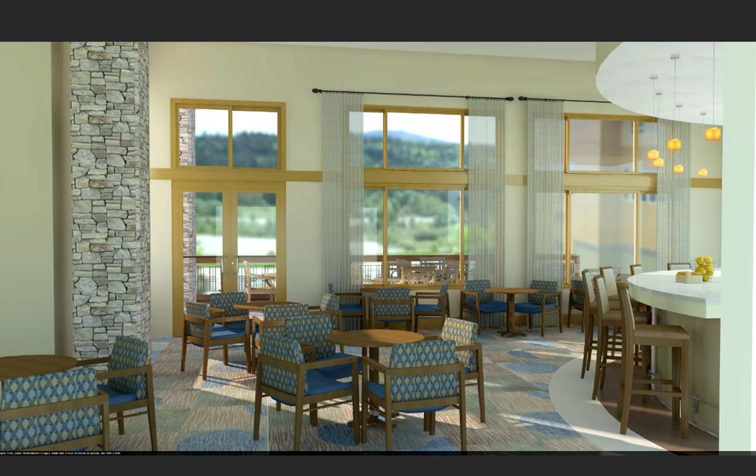Sometimes you're concerned that if something is too photoreal and too crisp, your client might be too locked into thinking this is the exact detailing it's going to look like in the end. Or sometimes you just want a different kind of feeling to present to the client when they're looking at your design. So today we're going to take this image and make it look a little more painterly using some very quick steps in Photoshop.

I'm not a Photoshop whiz, so this is easy for me, but also easy for you to replicate. This is the SketchUp model I used for the final rendering, and this is how the final rendering turned out. It's fine, it's okay, but going along with what the client really wanted, a little more painterly image, this is the image that we actually presented to the client.

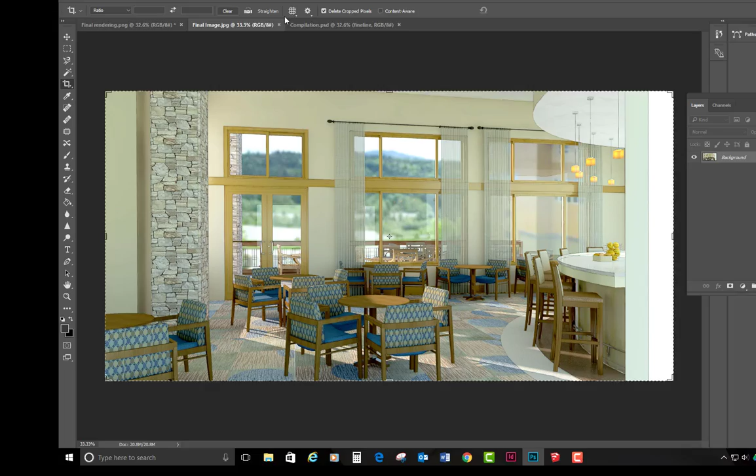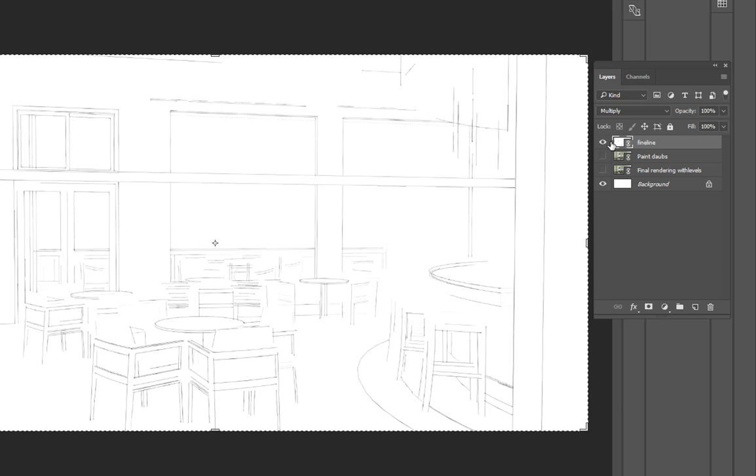Let me show you the 3 different steps that go into putting this together. Here in Photoshop you can see the 3 different layers I've combined. Here's the final rendering. I also created a layer called Paint Daubs, which is just adding a Photoshop filter to the final rendering. Then we overlaid that with line work that we pulled directly from the SketchUp model. Let me show you how those 3 steps come together.

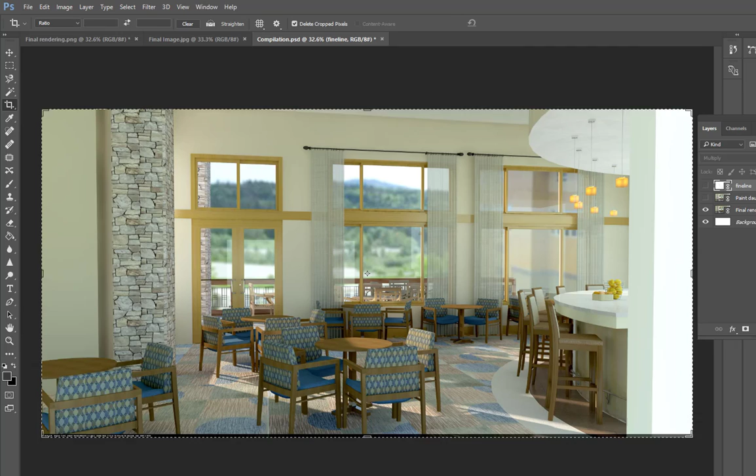First I'm going to note what size I rendered this at, so I'll go to my options. You can see I've made the image size pretty large, 4000 by 2000, because I want to print this out as a large board. So I'm going to go to Photoshop, File, New, and create an image that's the same size, just my blank canvas, 4000 by 2000, and create that.

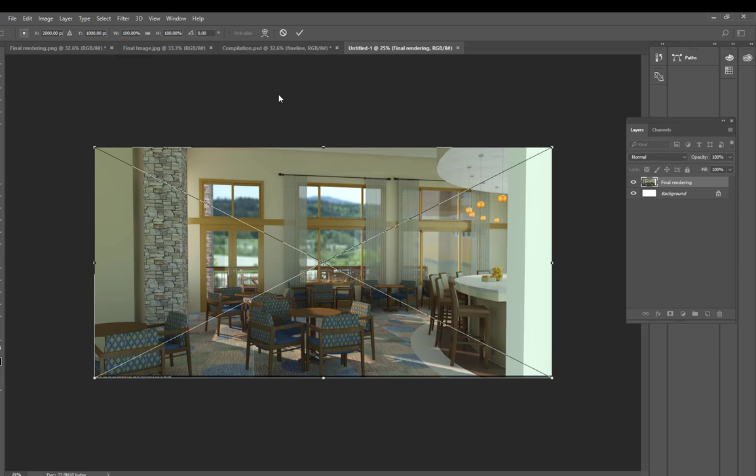Then I'm going to go to File, Place Linked, and go to my final rendering and import that in. Right now it's kind of dark, but honestly once I add these other layers I'll have to adjust the levels anyway, so I'm not going to worry about that too much right now.

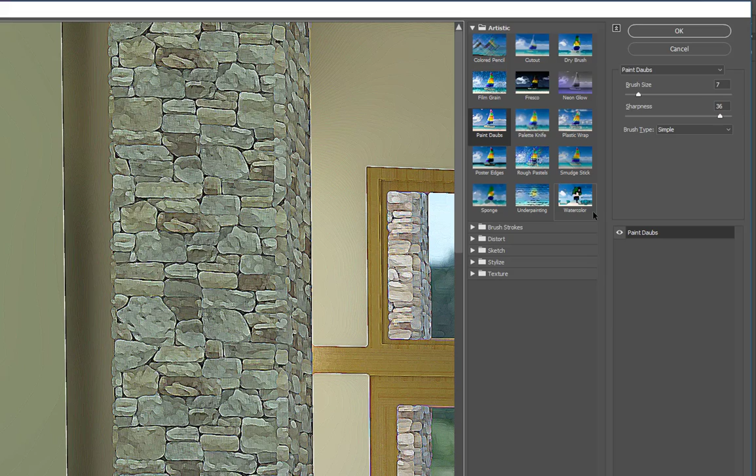The next thing I'm going to do is use Photoshop's artistic filters to create that more painterly effect. I've opened up the final rendering here, and I'm going to go to Filter, Filter Gallery, which opens up a variety of different kinds of filters, and I usually work with this artistic level. If you suddenly can't see your image, go back down here and just say Fit on Screen.

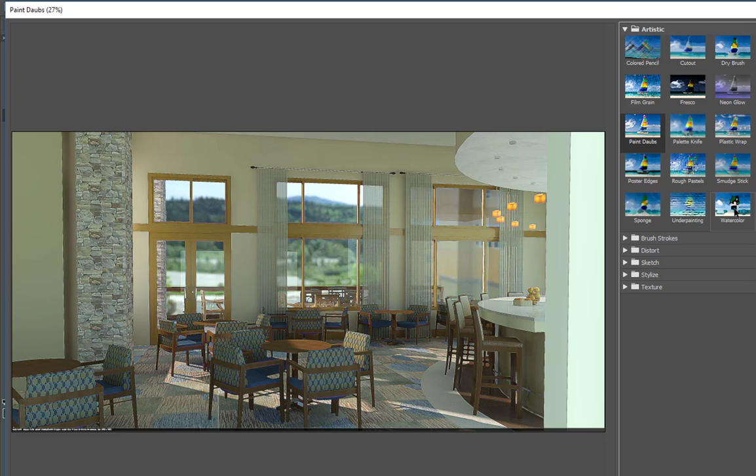A few that I use quite a bit are Film Grain, and you can see as I click through these what that looks like. This one's called Paint Daubs. I also use Watercolor a lot. You can see on any of these, by changing the level of the brush detail, the shadow, the texture, you can create different looks with each of these artistic filters.

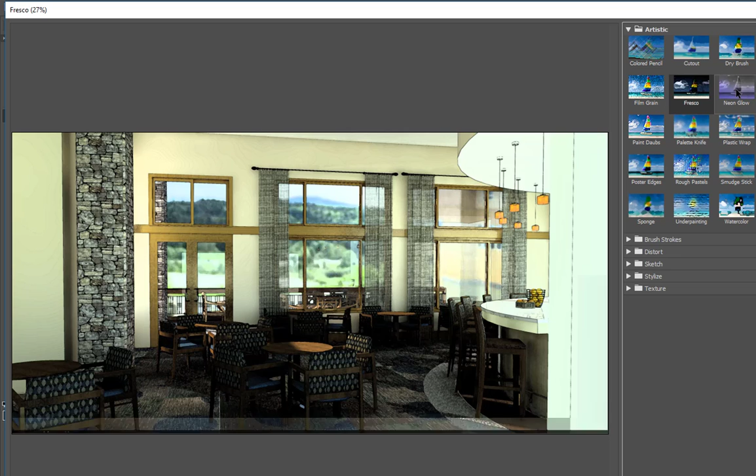It's kind of fun to go through them and see all the different kinds of effects you could get. Remember, this isn't going to be our final image - we're going to layer it with our final rendering to kind of give it a softer look.

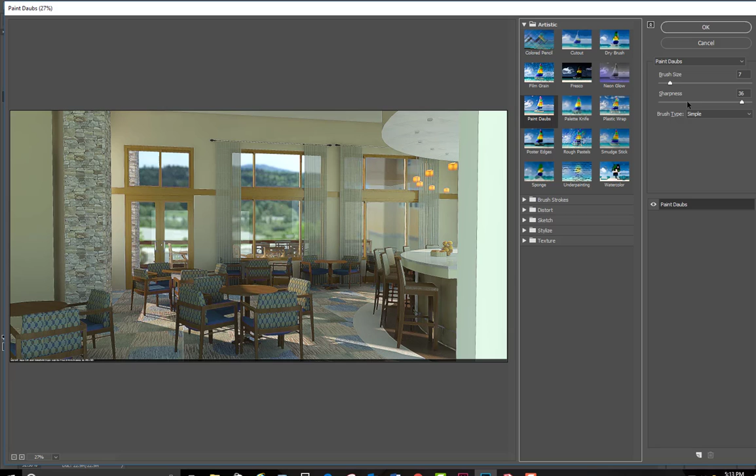I'm going to use Paint Daubs, which I use a lot, with brush size set at 7, sharpness set at 36. So it just creates this softer, not quite so crisp image of my SketchUp model here. When I have that as I like, I'm just going to say okay.

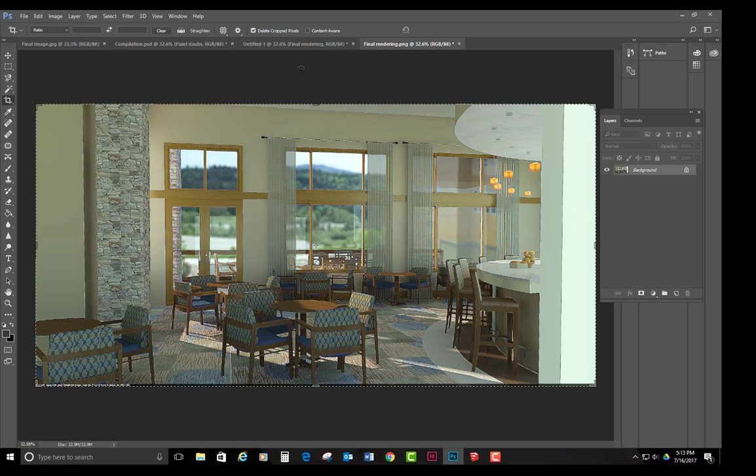And I could save that - I already have it saved as Paint Daubs, but save it as something similar, because that's one of the layers I'm going to put together in the end.

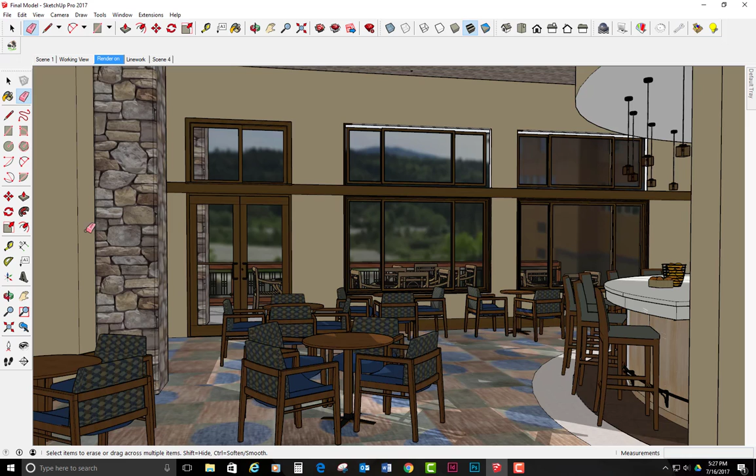Next we're going to create the line work that's going to be like an overlay to our final image, and we're going to pull that directly from our SketchUp model. Here is the image we were rendering, and I'm going to create the line work by using one of the styles that comes with SketchUp.

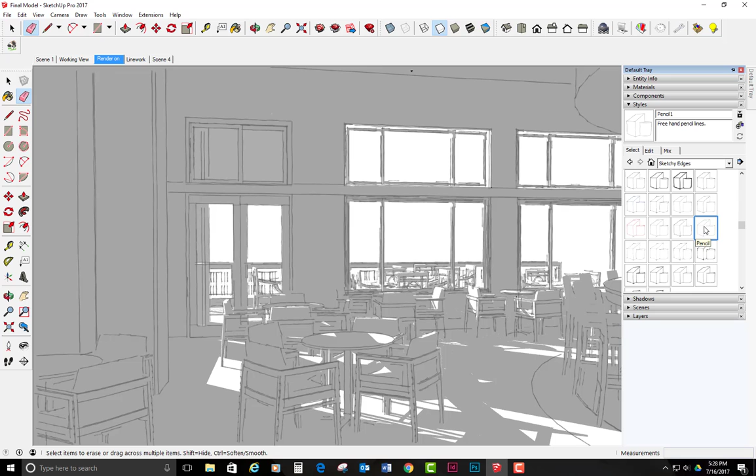Going to the sketchy edges is really a great place to start. I often use pen black, for example, or maybe I might use pencil. Whatever I use, I am going to turn off the shadows, and that's going to make sure the background is a nice uniform color.

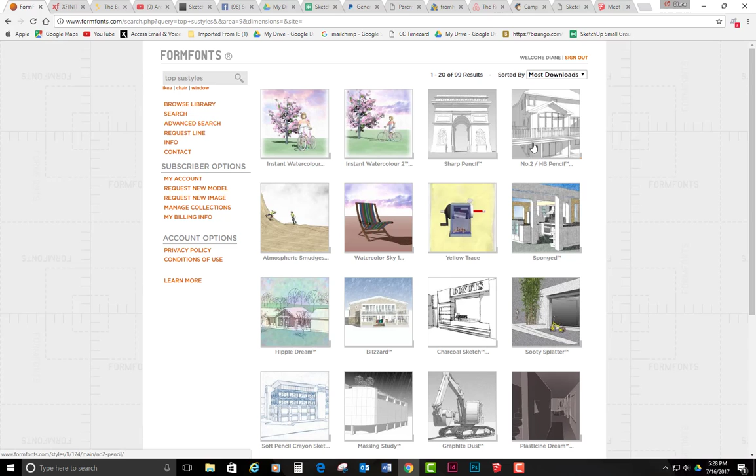Another thing I've done - I actually have my own collection of styles that I've created. If I go here and open a collection, you can see this is my SketchUp style folder, and I have a bunch of different styles here. Many of these came from my old friend FormFonts that I've talked about many times. In FormFonts, one of the things you get when you purchase a membership is SketchUp styles - all these styles that are way above and beyond what naturally comes with SketchUp, you can download and create your own collection like I have here.

So I'm going to actually use this one called Fine Line Graphite Sketch. I might want to create a tab, which I've already done here using that line work.

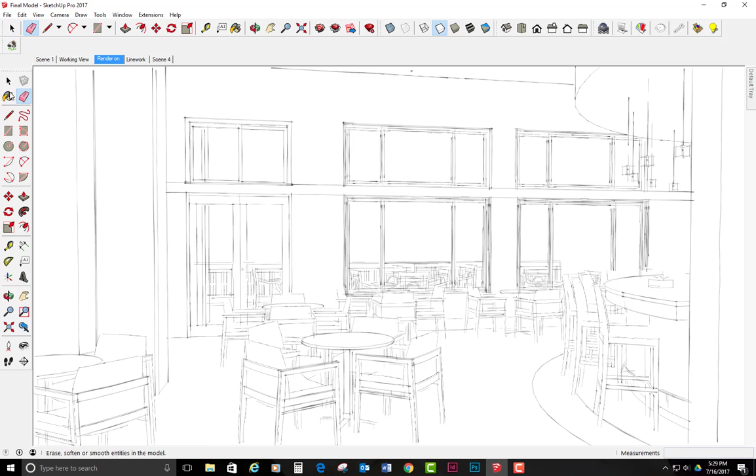I'm going to close this, and then to get the line work out, I'll export it as a 2D image. So I'll go to File, Export, 2D Graphic, which I've already done. The important thing is making sure the export width, 4,000 pixels, matches my original SketchUp rendering that we used to create our blank Photoshop canvas earlier. I'll click OK and export it.

The next step is to get all those different layers together and combine them into one image. Here I am back in my Photoshop file where I've imported my first rendering. I'm going to go to File, Place Linked, and bring in the Paint Daubs file, which should automatically line itself up, which it has. I can check that by going to Multiply to see how they lay over each other.

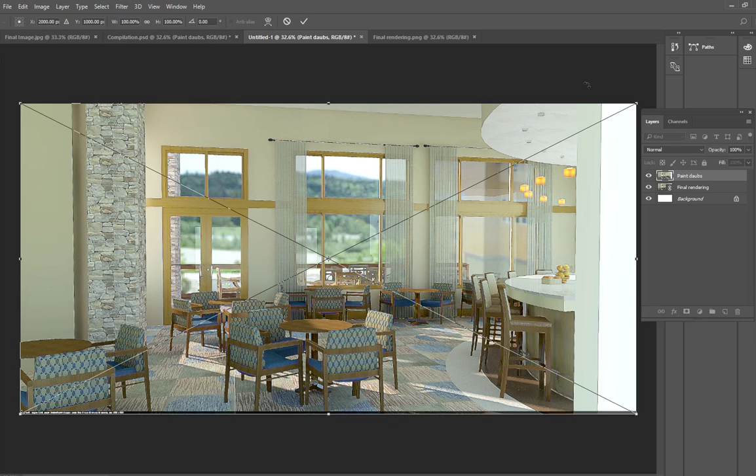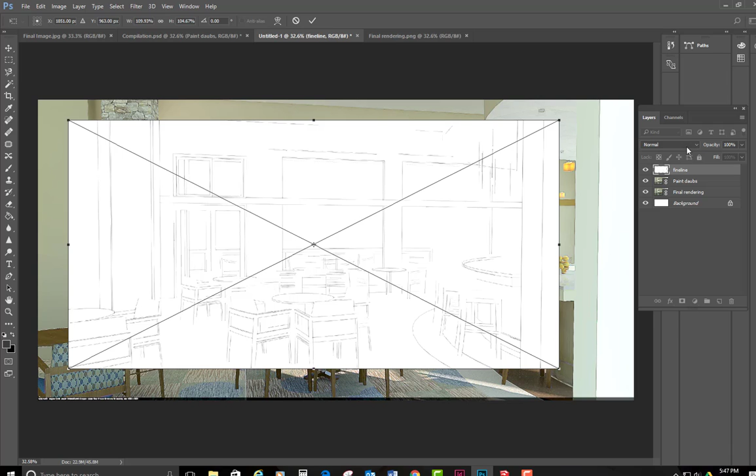So I'll go ahead and hit Enter. This layer is covering the final rendering, so right now all I see is the Paint Daubs image, but we'll blend them together in a minute. First I'm also going to place linked the fine line, which won't automatically be the same size, so I'll go to the Multiply tab again, which lets me see through the first layer down to the next.

Then, just by adjusting the size and scaling it, I can get these lines positioned. Sometimes it takes a little adjusting, but I'm going to get everything lined up so the lines match the image behind it.

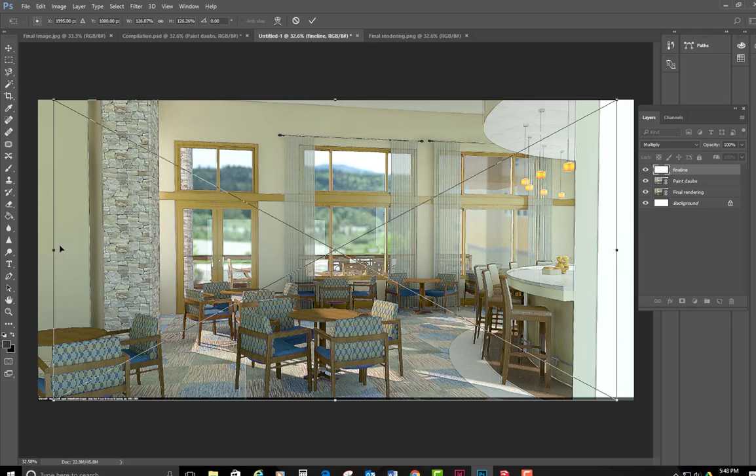And click Enter. Now I can play with the opacity of the different layers so I can see it all together. I'll go to the Paint Daubs layer and first go to Multiply, which combines the Paint Daubs layer with my final rendering. It's going to look really dark for the moment, but we can fix that with levels later.

In the opacity panel, you can see if I move that slider to the left with Paint Daubs selected, it turns that layer into just a little shadow, a little ghost, which softens up the final rendering underneath. I think I'll put it to about right here.

Same thing with the Fine Line layer. I can see I'm a little off here, so I'll scoot that over a bit using the directional arrows. That looks a little better. Same process—I'm still on Multiply, but I'll also decrease the opacity of that layer to make it a little softer.

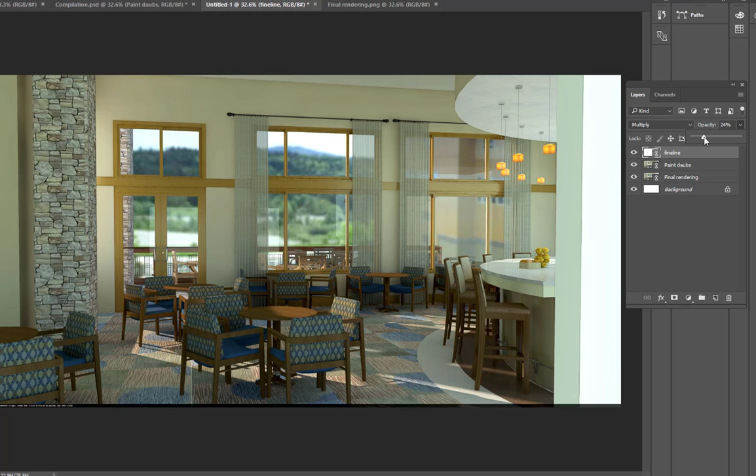Once I've got all three layers where I want them, I'm going to flatten the image. I'll go to Layer... but I might want to save this first before flattening, since once flattened all my layers disappear. I'll just call this compilation. Then I'll go to Layer, Flatten Image, and you can see I'm down to one layer again.

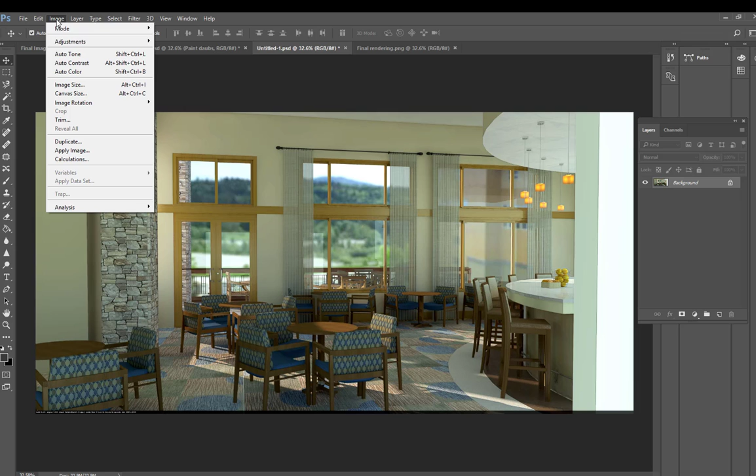Then I can adjust the lightness and darkness using Levels, which is the simplest way to do it. If I go to Image, Adjustment, Levels, I get a histogram that shows the variety of dark to light tones within my image.

You can see that if I move the slider on the left in, it darkens the darkest aspects of my image. Same thing if I move it in from the right, it makes everything lighter. And if I move the middle slider, that changes my midtones.

Very often you'll pull in the left and right sliders, which just gives it a little more contrast, and then adjust the middle slider. I want this to feel like a nice bright space, and then I'll say OK.

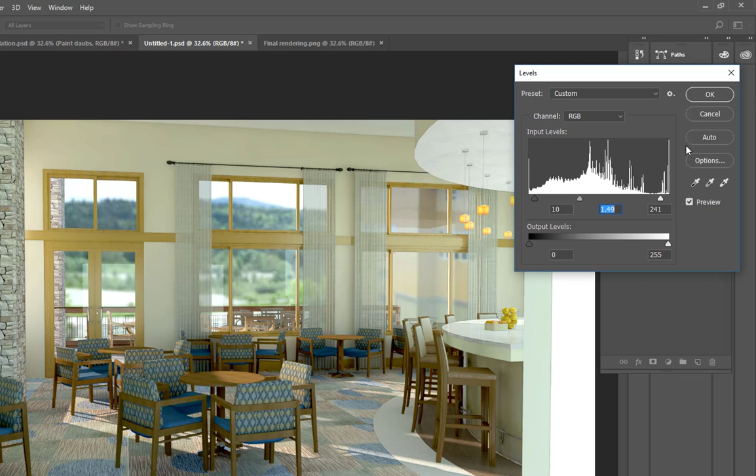And there you have it—in a few quick steps, once you get this down it should be about a 15-minute process. So again, here was our initial final rendering, and here's the image we created just by making a Paint Daubs layer using Photoshop's artistic filters, a fine line layer using the line work from SketchUp, and then using the Multiply and Opacity tools to blend them all together into a pretty interesting image.

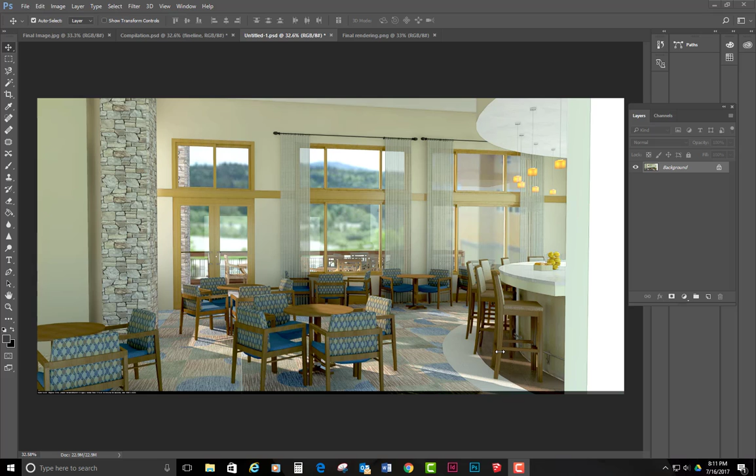That was an incredibly easy, incredibly fast way to quickly manipulate your images. But you can go so much further than this.

I want to again refer people back to the site called sketchupartists.org. There's a bunch of tutorials there about even more interesting, complex ways to take your SketchUp model, bring it into Photoshop, and create really interesting images. You can find this and many others by searching online.

In fact, that's my plan for the summer—I really want to learn more about using Photoshop to upscale my images. Look at that, how beautiful it is.